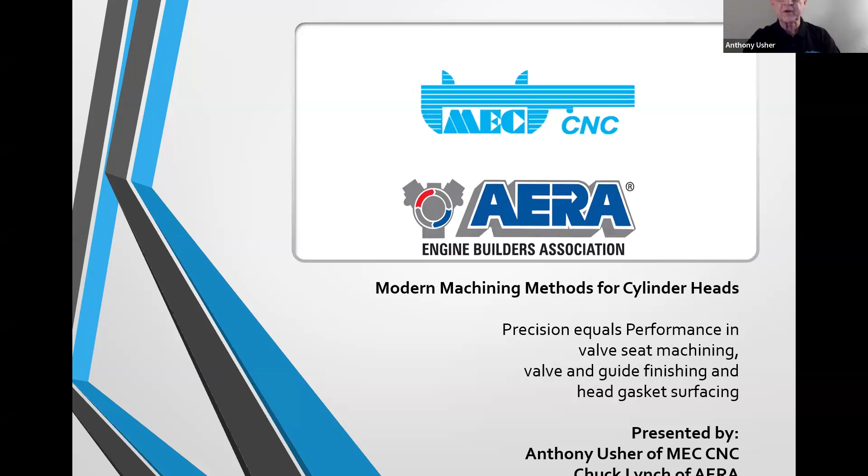I'm going to lead on the first part of this session, where it all begins: the valve guide. It's the heart of any valve train situation in a cylinder head. I'm going to let Chuck say a few things about the valve guide and take it from there.

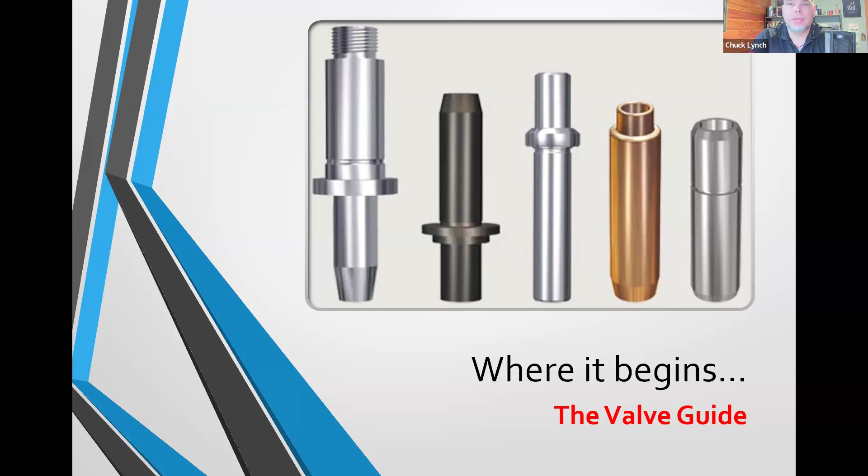As Anthony just mentioned, the valve guide is of utmost importance. When we get into the cylinder heads, I think it's one of the things we just don't give enough credit to. There has to be a point of origin, right? Everything has a datum. So you can't produce accurate valve seats if you don't first have good guide bores. If the reference point for the seat is subpar, the seat quality will suffer.

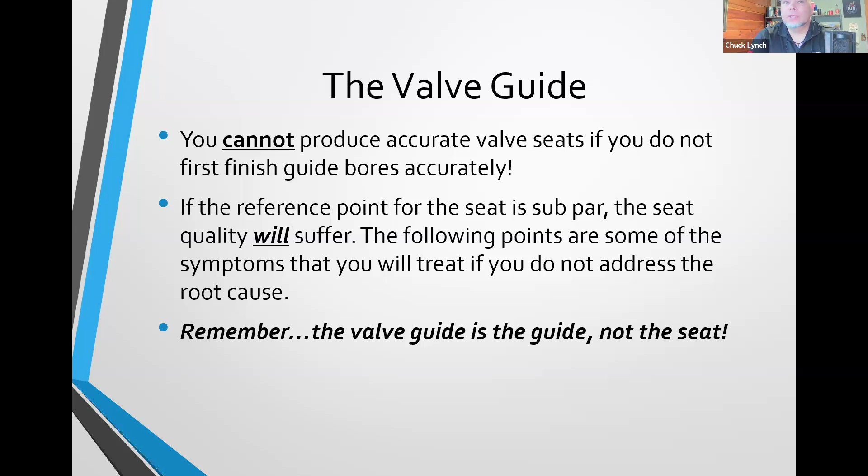So I like to summarize that the valve guide is the guide, not the seat. Now, one of the things we often see is people will vacuum test, and they vacuum test well. You're in essence putting two funnels together, and they will vacuum test pretty well because you can flex parts. So you really have to pay very close attention to the valve guide.

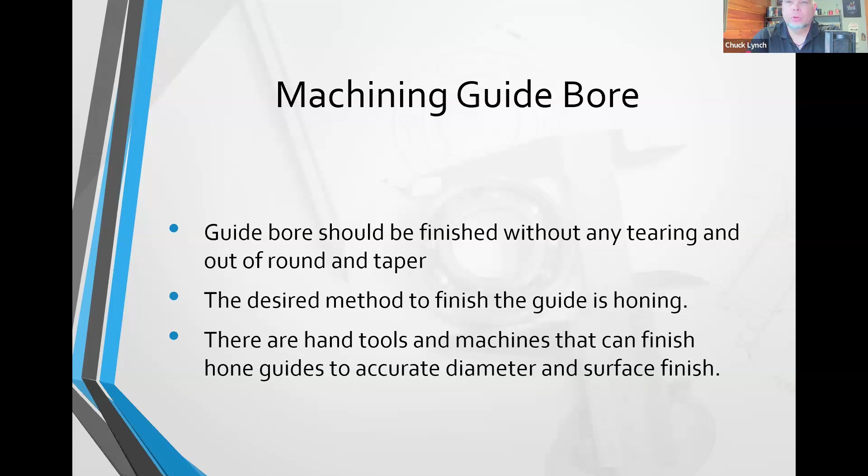Machining the guide bore should be finished without any tearing, out of round, or taper. The desired method to finish the guide is honing, to make sure you're straight, true, and round. A lot of people ream to get close, but ideally you want to finish the bore so you can really control surface finishes. There are hand tools and machines out there that can finish hones to accurate diameter and surface finish. Anthony, you want to jump in on that? That's your world.

Thanks, Chuck. Yeah, we focused on guide bore finishing, and we know the guide is the most important thing before we even start on the valve seat. So at Robins, we've been developing machines to do all the guide work with heads of integral guides. We've got a core drill system where we can core drill out the heads so you can install loose valve guides. We then have reamers that can bring the guides close to size, and then diamond hones to finish them. We've got a machine that does all these processes, and we're able to finish guides to very accurate tolerances, straight, round, and on size as well. That's the most important part of starting the whole process, before we get onto the valve seat.

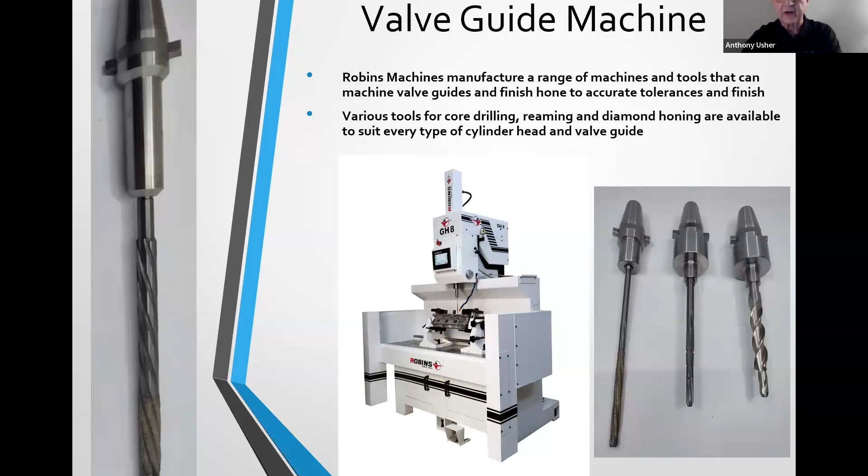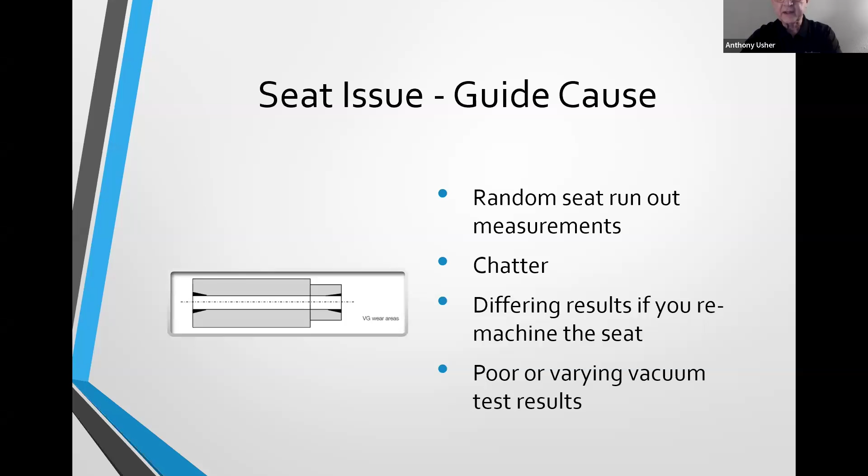So we'll move on to the valve seat, and a few other things about the guide that can create problems with the seat. Of course, random seat run out often comes from guide problems, chatter when cutting the seat, and problems like that. Of course, vacuum issues can come through the valve guide as well. So let's go on to a little bit about the valve seat.

Now we've got a perfect guide. Let's talk about the valve seat and what we need to get there. Chuck, would you like to come in a bit on the valve seat? Sure. So the primary function of the valve seat is to provide a combustion seal. We all know that — it's one of the reasons we vacuum test.

So concentricity, or seat run out, should be less than the stem to guide clearance. We get this question often on the tech line. People look for this — in my past, in the shop, everybody's looking for some kind of rule of thumb number: hey, what can my valve seat run out be? And you really need to think about where you're trying to put your stem to guide clearance. You cannot have more run out than you have stem to guide clearance.

I'm going to go back to my little analogy of the funnels. I have two tapered angles that are going to wedge together. Anybody familiar with machines knows the terms Morse taper, R8 taper — you have taper forces that are exceptionally high. So I can get those two wedges to come together, but what's going to happen to the valve stem? It's either going to flex the stem, but that stem's going to try to move proportionally. So in seat and guide machines, we often have an issue with perpendicularity, more so than off center line.

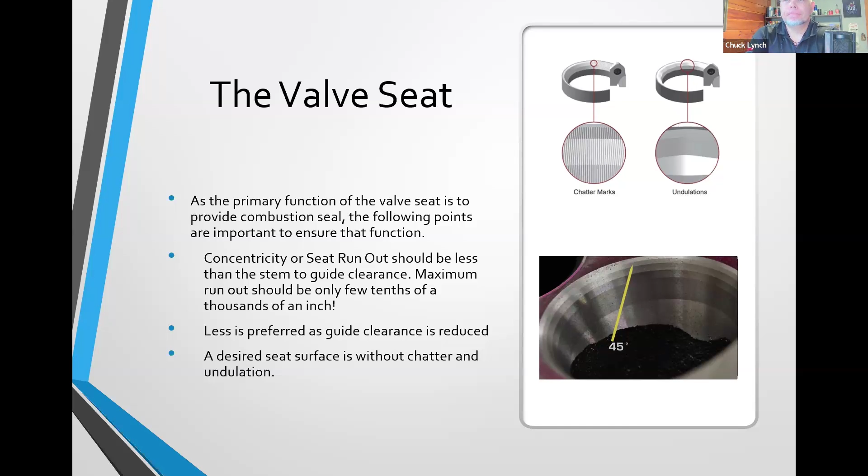Robins valve seat guide machines are well developed, a few thousand machines in service worldwide, up to nearly 30 years, and some doing 30, 40 cylinder heads a day. And these machines can get these finishes on the guides that Chuck's talking about, without chatter, without undulations, and with very little run out.

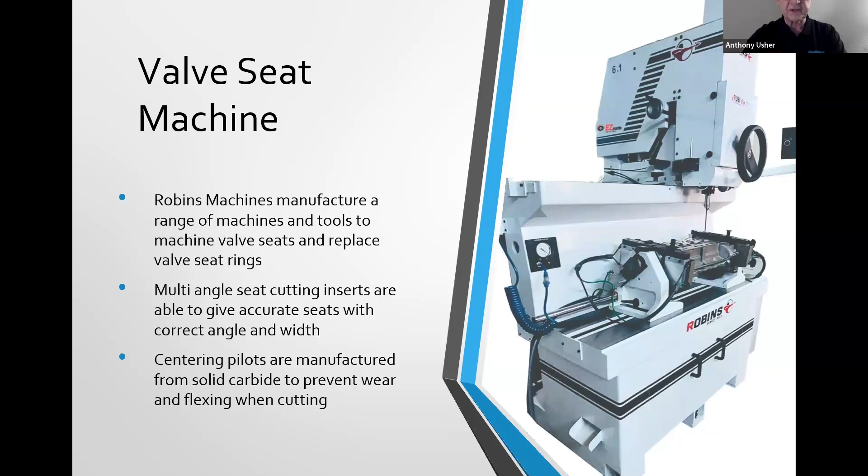The better the valve guides are finished, the less run out we get. These machines have multi-angle seat cutting inserts, which can have different profiles, different angles, different widths, so all that process is done in one cut. The centralizing pilots used for seat cutting are manufactured from solid carbide, ground to very high precision. Being carbide, they don't flex, and they have very little wear on them.

Robins have been developing some new technology valve seat cutting systems. We found cutting with a single insert creates some side thrust, and we've now developed tools that have dual inserts, 180 degrees opposed. We're finding that this cutting system is reducing side loading on the cutting system, giving better finish, much finer finish, and reducing run out once again.

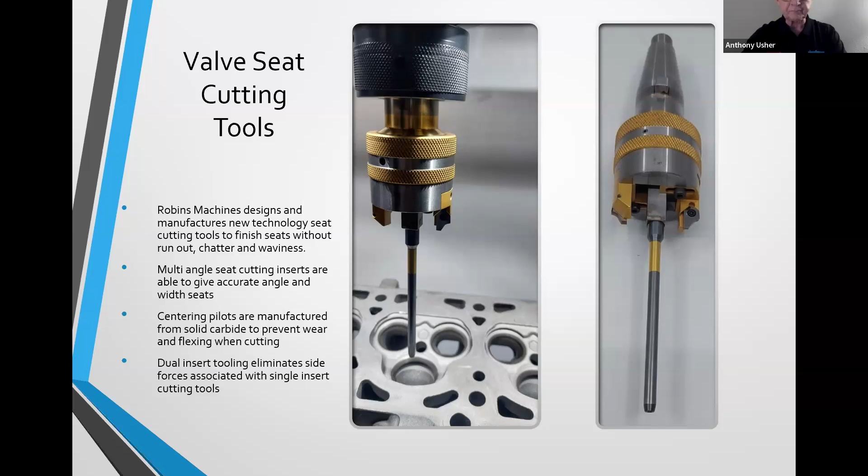So we don't have to have pointers on a valve. We can dial in exactly the diameter we want. Both insert holders are on adjustable slides, and the dial indicator will tell us that we have that exact diameter.

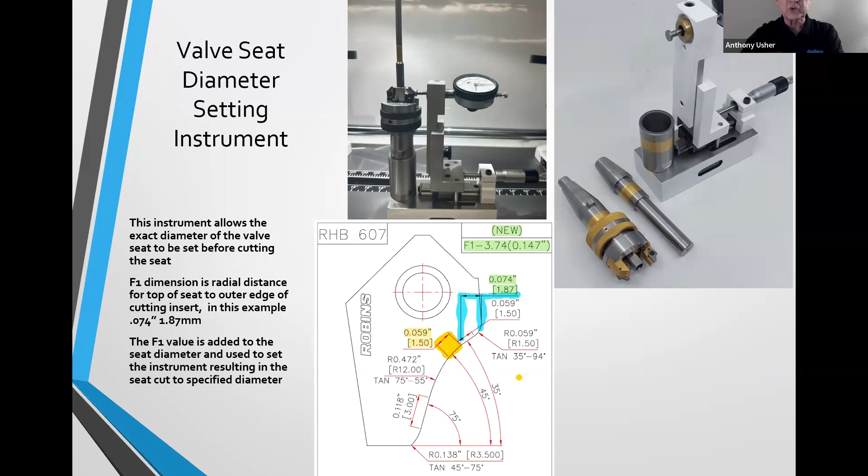We also provide this tooling system for counterboring housings for new insert rings, sometimes used for boring out old insert rings. Some insert rings are very hard to get out mechanically, and you've literally got to cut them out. So having dual insert tooling speeds up the process, and again we get very accurate boring sizes for these inserts.

And Chuck, I remember the other day we were chatting and you had something to say, the valve seat is not the guide. Maybe you want to say a few things about that? Right, yeah, I said that earlier in the presentation, and you just really need to drive that point home, that as that taper has that high wedge pressure, some of the racing heads have a 55-degree seating angle, so with that high wedge pressure you can create a lot of flexing.

And moving on, as you mentioned about transferring the heat from the valve into the casting, the importance is not only run out, but contact, that you are making good full contact.

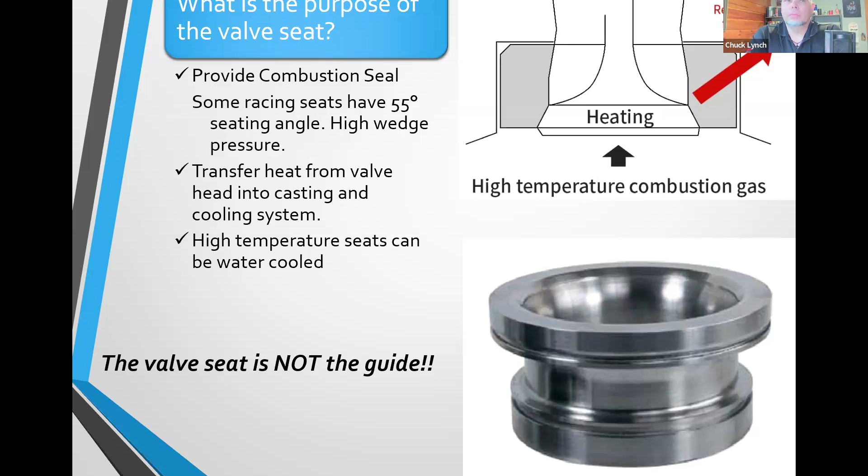In the racing world, this is not even the RPMs that we see high, but just for simple numbers, say 6,000 RPMs, the valve's opening and closing 50 times a second, and your exhaust valve may go from 500 degrees F to 1300 degrees to 500 degrees F, and we're doing that 50 times a second. So sometimes it's just hard to fathom what the valve seat has to stand up to.

So continuing on the valve to seat contact, in the past I worked on this a lot, trying to get to the point of having full face contact and non-interference angles. And quite honestly, even in shops where you can spend a tremendous amount of time on the valve seat job, it's just impractical because the seat insert manufacturer has a tolerance, right?

So Anthony, I would think that's usually plus or minus 15 minutes. Yep, on the insert. Well, the valve supplier also has that same tolerance, so the probability that you're going to be able to have full face contact is quite unreasonable. And then you also have cylinder pressure that is pressing against the valve head and is going to force that to the seat too. How much really depends on how the valve is designed, how heavy the head is, margin area, the materials that are used, and so forth.

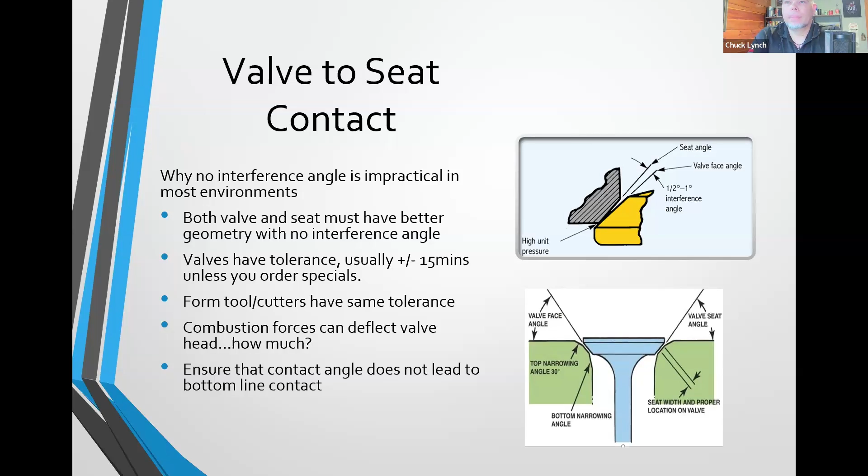That's really interesting, Anthony. Yeah.

I'm just curious, and we do have a question from the chat I want to throw out there now. It might apply a bit later on, and if anyone wants to ask one, feel free to type it into the chat, we'd love to answer anything we can. I'm curious, when we start talking about breaking parts, and the precision involved, not only in the surfaces themselves but where the seat is, where do the biggest problems come from when we're talking about breaking parts and having some inaccuracies in this?

Well, nice question, Brad. The screen I just put up is all about focusing on breaking valves. We've all heard about a dropped valve, where the head comes off and flies around the chamber and destroys everything. We look at it and say we had a bad valve, the valve broke, and we get a hold of the valve manufacturer and say your valve destroyed my engine.

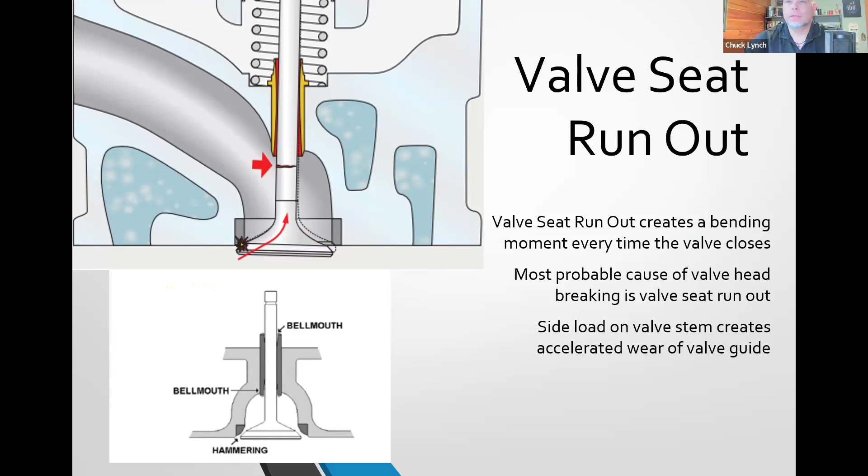Right, so yeah, vacuum decay, there are some standards around that. And I would just like to add, both of these tools individually are good tools. So a lot of folks vacuum test, but they don't have concentricity gauges. It's something that needs to change in the industry, because it helps you tell the condition of your equipment.

If I have consistent run out, say at 2 o'clock on every valve seat that I measure, I have something set up with my machine I can adjust. If it's random, it's guide sizing, pilot selection, something of that nature. If it's a machine with a steering wheel, I call it torque elbow, it's the operator. So if you have random seat run out, that's a tougher thing to address, but it can very much tell you what's going on with your machine.

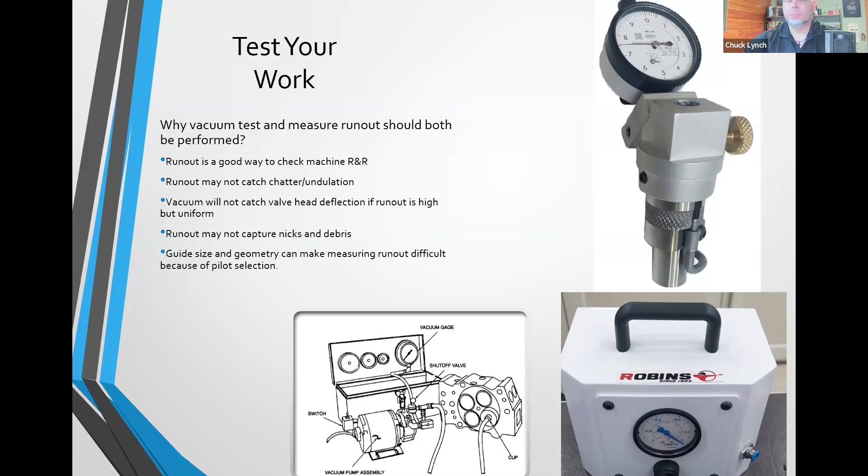Some little things on valve seat machining challenges that can create problems when cutting the valve seat. One of the points that I often find is people extending tool holders out to their max or even past their max radius dimension, which creates flexing and can create vibration. So most rigid tool holding is the most desirable process to cut the valve seats.

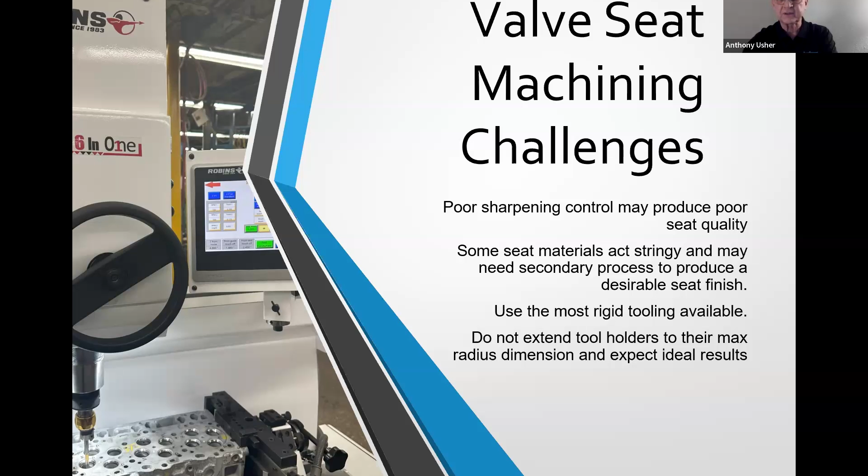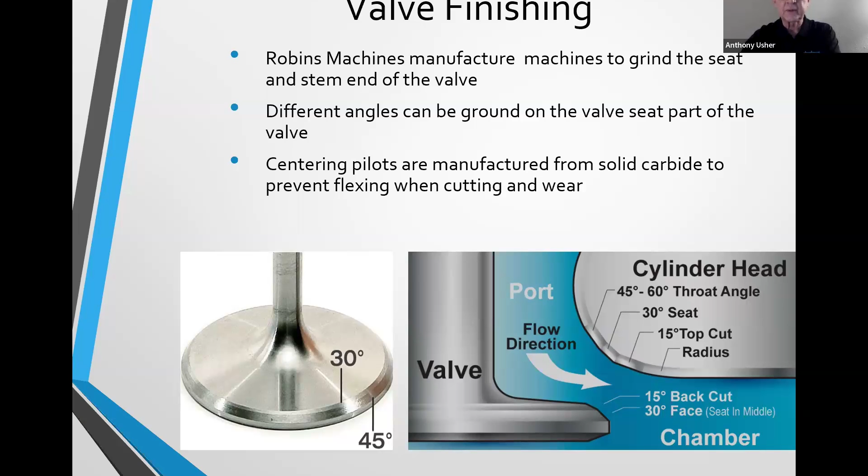I think we should also talk a little bit about the valve itself. When we talk about runout, we often talk about seat runout, and sometimes the valves themselves have runout. New valves, reground valves often have runout, and they create similar problems to what we mentioned before with seat runout. So this is an instrument that can be used to measure valve runout.

And in some cases, we actually have stem runout. So this instrument here is quite a sophisticated instrument. It can quickly be moved with the indicator on the valve stem to see any stem runout. And there's other devices available in the market just for measuring valve seat runout, or the seat part of the valve runout. And I always recommend checking even new valves. We find new valves can have up to 1 thou runout, and that can create vacuum problems. You can find them with vacuum, and sometimes you think it's the valve seat, meantime it's the valve that's actually got runout.

And actually an interesting thing that you can also do, you mentioned the stem runout, but you can also pick up on the shape of the stem. So say when the manufacturer is making the valve, it's just like cylinder honing, the different orders of geometry. So if I have slippage in the centerless grinder, I can have lobing on the stem, and sometimes it shows up after the engine's run in the guide for a while, and you'll see it looks like it's got tiger stripes or something, and that's a condition that makes it difficult to grind the valve face, because it's not going to repeat, especially if I'm running a centerless valve face grinder.

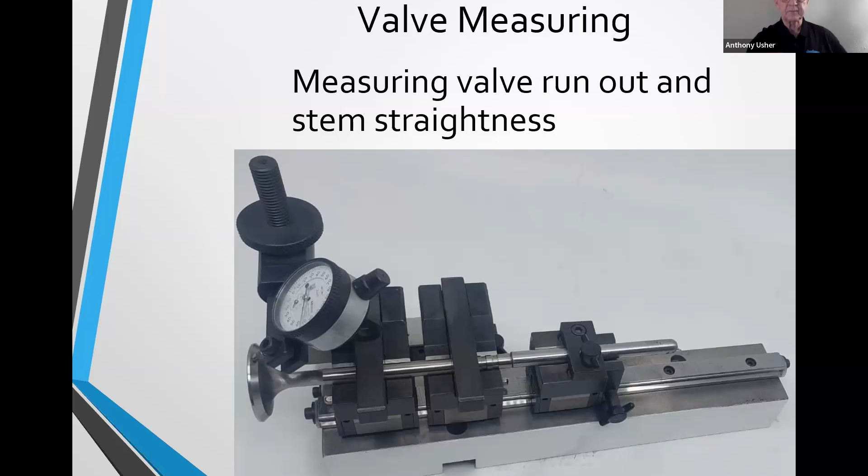Thank you, well said. And I know we sort of just talked about this breakage a moment ago, and I think this is a great illustration of it, Anthony. Yeah, I think so. It really shows if it's valve runout or seat runout, that's flexing on the head and wear on the guide.

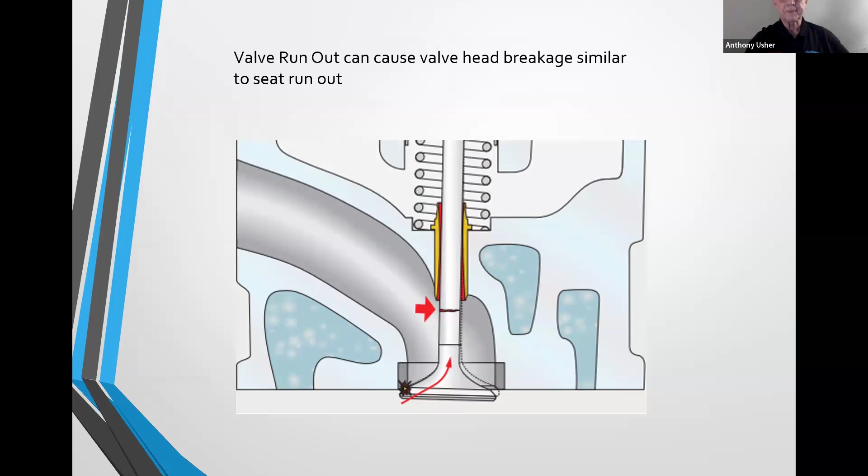Okay, that's a typical machine, a Robins valve grinding machine. This machine will grind a valve within 1 to 2 tenths runout, and can also accurately dress the butt end of the valve and chamfer the butt end of the valve.

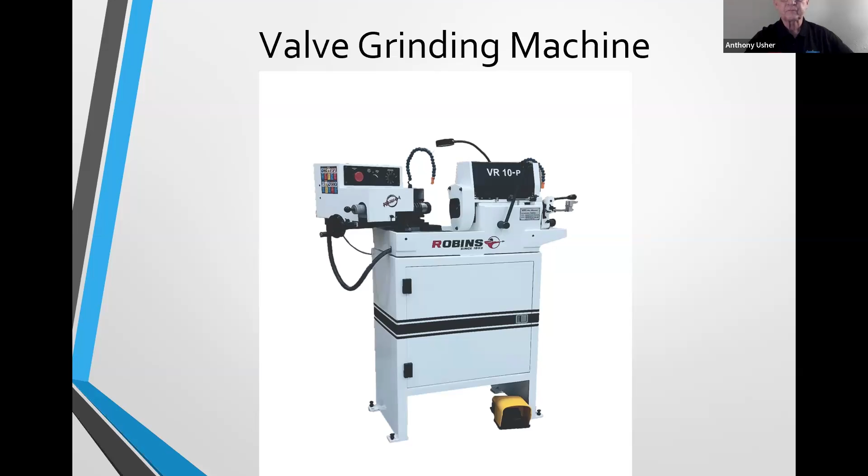Well, let's go on to talking about cylinder head gasket surfaces, and three important things. And I'm going to hand this back to Chuck. He's an expert on this head gasket surface.

So, surface roughness, flatness, waviness has always been important. But if you look at the modern engines, what percentage of them are using MLS gaskets? MLS is the acronym for multi-layer steel gasket. And they have taken that to definitely the next level.

This stuff has to be flat. It has to be smooth enough. And when we talk about flat, you have overall flatness, but you also have the waviness that's created, typically not by your insert or something of that nature. It's going to be induced by how rigid your setup is, or machine features. There are a lot of old gear drive machines that maybe induce waviness. So those are things that we have to look at today that we didn't once give a whole lot of consideration to.

So this illustration here is a good example of lay or direction. If we have a milling insert that's traveling in a particular path, and you get that semicircular pattern that's left on a gasket surface, that's your lay. The waviness spacing, again, that's what's induced by your frequencies within the machine. The waviness height, and then the roughness height.

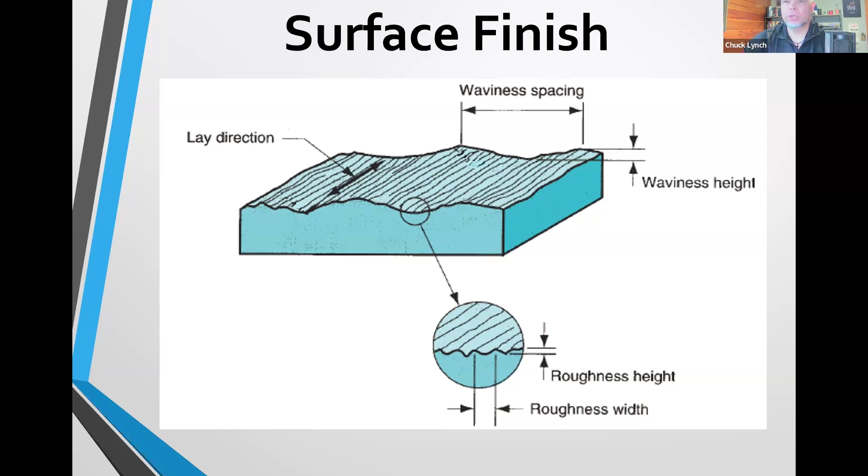So roughness height and waviness height are totally different. You can have a roughness that's ideal, but have excessive waviness and still have similar type failures. So there's a lot going on with surface finish.

But that's what the MLS gasket people are talking about today: waviness. What does it look like over a long distance, not just a short distance? As Chuck said, roughness can be good, but waviness could be poor.

Right, right. Something simple for the folks that maybe aren't into the engine machining part of it on a day-to-day basis. People are always interested by measurement, and when we talk about measuring surface finish, it's the most accurate stuff that we're doing in engine building.

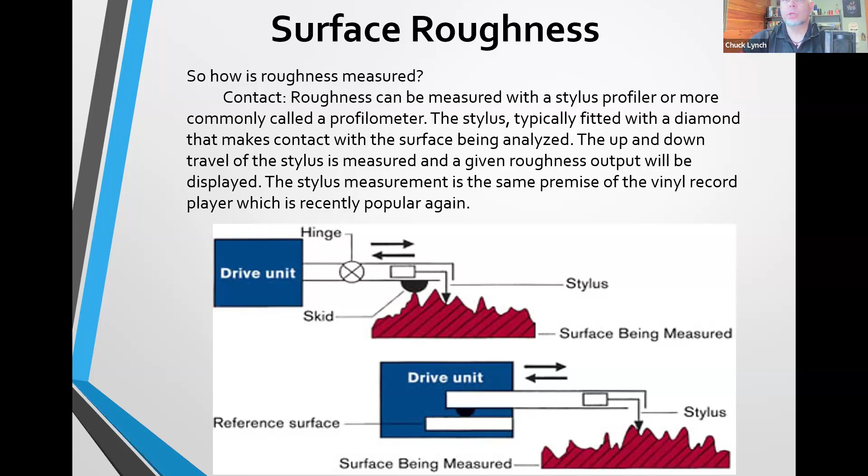And it's extremely important. We've done a lot of stuff on cylinder honing as of late, been a ton of good presentation on that. Mark Malberg's been helping out on a lot of these different areas of surface roughness, flatness, waviness, and so forth. But when we're talking the roughness for these gaskets and piston rings, if you were to take a hair follicle, which measures about 3 thousandths, and look at the column end of it, you're going to slice that 2,000 times. And that's the kind of stuff that we're measuring.

So just to put a real world kind of measure to that, that's how small of a scratch in the surface matters. So anyway, surface roughness can impact the gasket's ability to perform in the short term and the long haul. Aggressive surfaces can shear gasket materials. Back in the day, we used to say, oh, we need a gasket surface that can bite the gasket. Even with composite gaskets now, those days are kind of gone because we do heated pre-flattening and there's the coatings and so forth. We don't need that anymore.

So aggressive surfaces wear down quickly. They allow combustion armors to move and ultimately leak. This is all often observed as fretting or false Brinelling when evaluating head gasket failures.

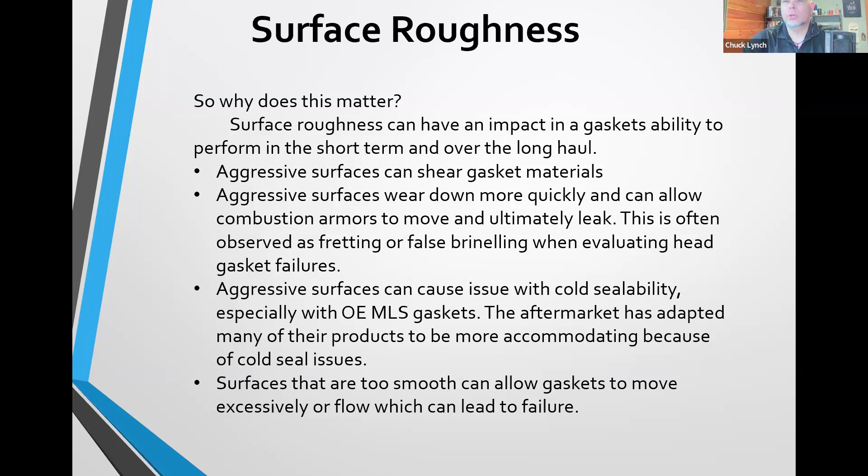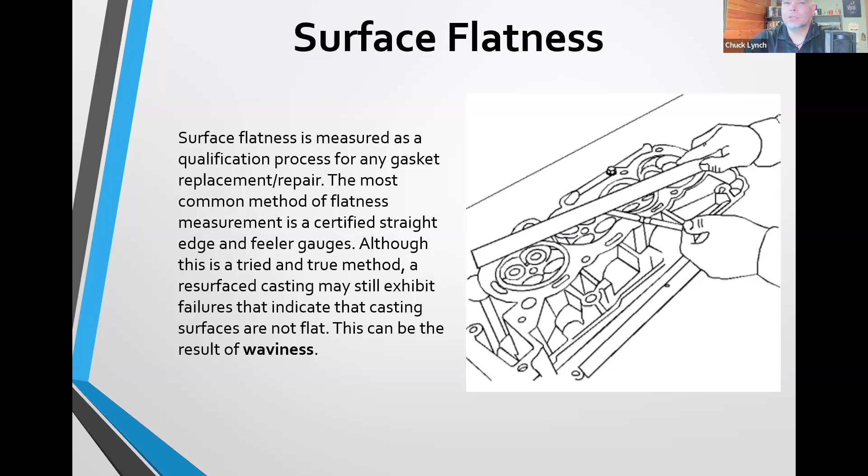If we're using milling or grinding, we're just not going to get there. You would have to lap the surfaces, so it's not so much of an issue anymore. Surface flatness is, this is in service manuals and so forth now, and people use a straight edge and a feeler gauge, and it's just about gotten to the point where it doesn't bring a whole lot of value. There's too many surfaces to check in small little areas. If I got a feeler gauge that's a half inch wide, and I'm measuring an area that's a thou out of flat, you have to measure so many areas to indicate that. So again, I don't think this is much value anymore. Most everything needs to be resurfaced. If it was taken off and went to a shop, you better resurface it. That's strictly an opinion, but that's kind of what the industry yields anymore.

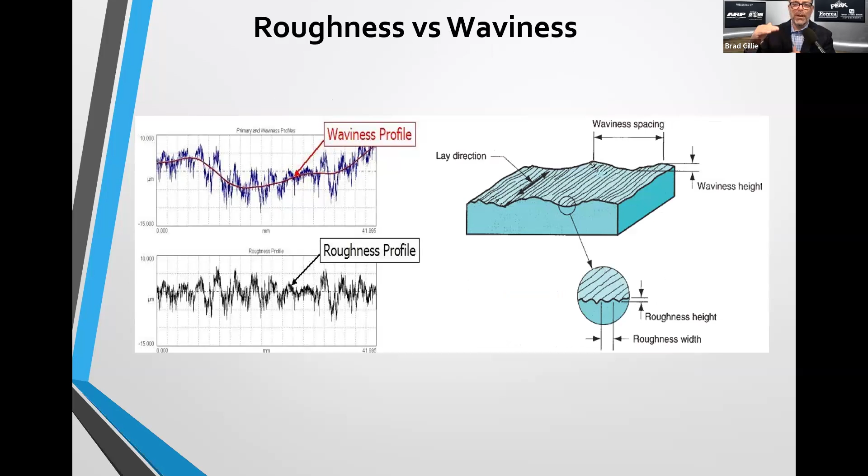That's a great illustration too of just what impact the waviness is going to have, with the higher points and the lower points versus just the same peaks on the roughness side, whereas the wavy side is definitely going up and down. I think that illustrates very well what you were talking about.

Right. An MLS gasket doesn't conform to those waves like a conventional gasket does. So it's kind of like a suspension bridge. It's under tension, so it's not sagging all the way to the very bottom of that valley. So it just doesn't conform. So I have a leak path under there and over a long distance.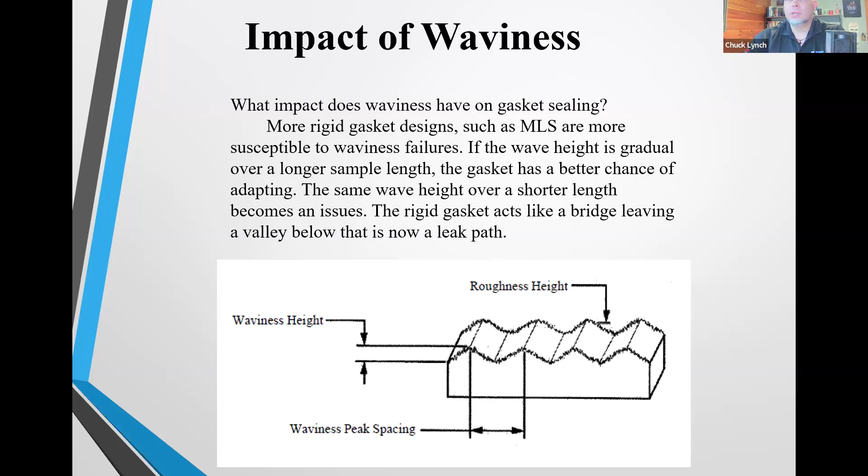Now I've dissected a lot of MLS gaskets over the years, and they hide things because of the coatings and the type of material it is. You don't see some of the indications that you would see in a conventional gasket. But one of the things you can do is drill out the rivets and lay out the layers, and sometimes you see where combustion went between the layers of the gasket. It looks like tiger stripes or zebra stripes or something, and that's an indication of waviness. So stuff was moving between the layers of the gasket that didn't really show up on the face so much.

So that's kind of a good thing. You say, hey, if I've got combustion in the cooling system, hydrocarbons, or whatever, then maybe I take that gasket apart.

All right, some factors that influence roughness and waviness. The cutting tool insert, PCD works terrific for aluminum, but will fail quickly on cast iron. CBN works for both, but usually you tend to see some smearing on the aluminum. The aluminum galls to the insert a little bit, and it may not even take it out of the roughness and waviness parameters, but visually, which, we do a lot of visual identification of what we feel is good or whatnot. So sometimes we use the PCD, the polycrystalline diamond, and we just really like the look of that.

The insert edge prep and condition, tooling suited for iron but not aluminum. You could have a situation where the edge prep of the insert would be honed or have a taper they call a land. And if you take away that sharp edge, it's less likely to chip. So it gives you more durability over a longer period of time, but you also tend to have more tool lift. So you may not get as truly flat of a surface as you would with a very sharp insert. So again, you got what does the tool yield, what can I tolerate?

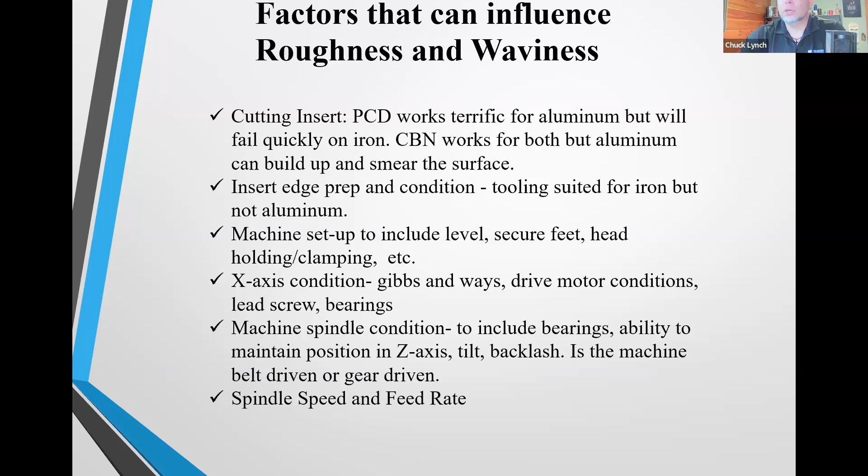Spindle condition, bearings - again, it goes back to preventative maintenance. Speed and feed is the one that people typically think of the most that impacts roughness. Where waviness could come in is, do you run your machine faster than the capability of the machine? Then you could induce some waviness and so forth, because you start to get out of balance or something.

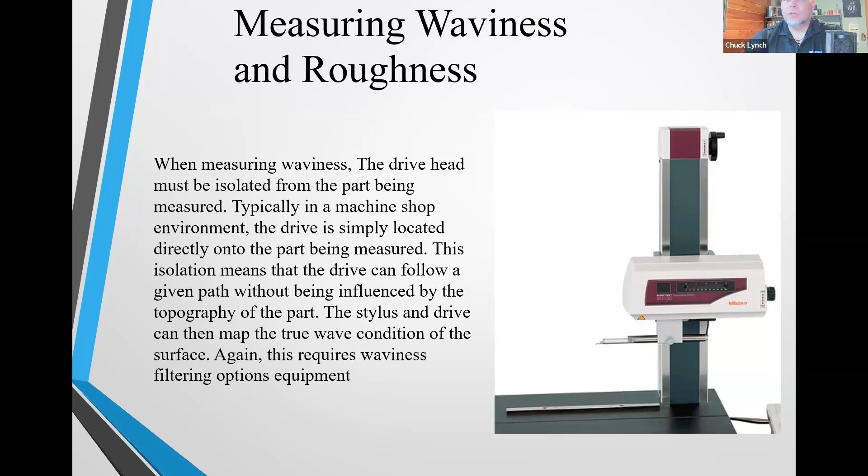Again, I think we kind of covered this pretty good - measuring roughness versus waviness. The device to measure waviness is a skidless instrument. Skidded instruments are used to measure roughness. So the skidded instrument will set right on the part, and the skidless instrument, which is shown there, you isolate it from the part that you're actually measuring. That goes into more detail about the device being used. But if you're going to measure waviness, you have to step up to the next level of equipment, which is a skidless profilometer.

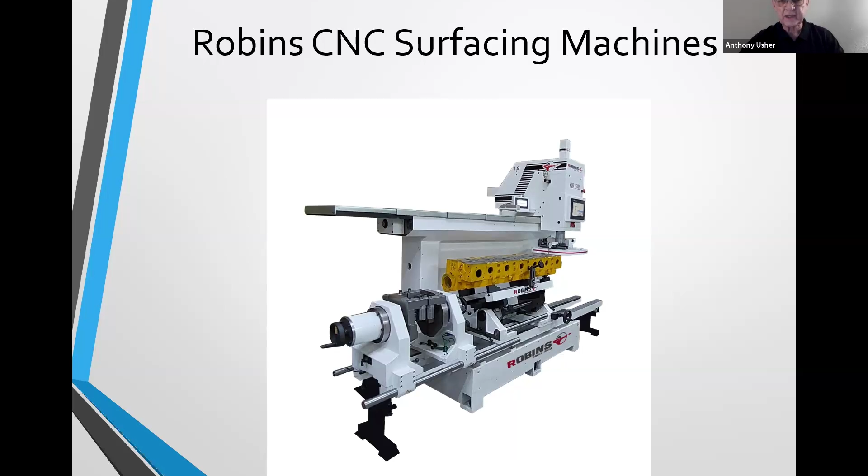I'll go on to this solution and the Robins machines. We at Robins have done a tremendous amount of development on surfacing with these three factors: roughness, waviness, and flatness. The whole design of the machine - the precision ball screws, the servo motors, belt-driven servo motors driving the ball screw - all these factors come together to produce extremely accurate roughness and waviness. And of course, the whole accuracy of the machine will also induce very accurate flatness. So these three factors are what we have taken into account with Robins surfacing machines. We can handle from very big heads - this head is nearly 44 inches long - down to very small heads, single cylinder heads, and produce those three factors to very accurate tolerances.

Well, that's about all I have from my side for now. So I'll say it's time for some questions there, Brad.

Yeah, for sure. And by the way, for both of you, that was quite an education - from both you and Chuck, and Anthony, and obviously what a great solution as well, Anthony, with Robins. We do have a couple of questions. This one says: what sources are there for cylinder head/block dimensions, architecture, datums, locations, angles, etc.? So I guess this is, what sources are there to make sure that we're having the right accurate measurements, angles, and all of that?

Land speed record holder George Poteet's Speed Demon rocketed 481 miles per hour at the Bonneville Salt Flats. You don't go that fast without ARP fasteners. There's no way we could go the speed we've gone, the number of times we've gone, with a lesser quality bolt than ARP supplies to us. We absolutely wouldn't be where we are today if it weren't for ARP. When failure is not an option, it's ARP-bolts.com.

We're Performance Plus Global Logistics. Our team of dedicated performance industry and logistics experts get valuable cars and components to the track on time and in top condition. We provide expedited logistics solutions for the performance industry using direct routes instead of deferred options, and communicate all necessary information to the appropriate resources to meet regulations and ensure smooth transit and secure delivery, both domestically and internationally. We exceed customer expectations by providing best-in-class service with an efficient, cost-effective system in place. Contact us today to book your next shipment.

You work as hard as your truck, and you have no time for downtime. That's why more truck owners trust BlueDEF, America's number one diesel exhaust fluid brand. Each batch is guaranteed pure, so you can avoid costly repairs caused by inferior DEF. Demand America's best for your truck. BlueDEF and BlueDEF Platinum, put trust in your truck.

With roots in the Midwest that date back well before the Model T, Fifth Third Bank has a long history of serving the needs of automotive companies. While much has changed over the years, our passion for helping businesses put cars on the road and on the track has not. Today we are more committed than ever, as a member of SEMA, a founding member of PRI, and a sponsor of multiple race teams across several racing series. For over a decade, Fifth Third Bank has been a staunch supporter of our industry and a great partner for many companies in motorsports. Our business has been growing extremely fast, and we could not be where we are today without Fifth Third. They provided amazing strategic advice and the capital we needed to support our phases of growth. They are true partners for me now, and what they do with their involvement in motorsports is untouched in this community.

Where can we take your business? Fifth Third Bank.

Where will you find Ferrea racing components? Circle track, drag racing, and any top race shop. In every form of motorsports competition, our valves and valve train components deliver race-proven design and technology, and we've brought that same performance to our street applications as well. We're backed by five decades of experience, an extensive range of off-the-shelf components, and our custom valve department has the fastest turnaround times in the industry. Ferrea Racing Components: stand with us, or race against us.

Scribner Plastics has provided professional strength shipping containers to the automotive and performance industry for over 40 years. We have containers that fit most unique configurations of complete or partial engines and transmissions. Today we highlight part number 5148, the cylinder head shipping and storage container. The base has double-walled durable construction featuring a cinch strap with an abrasion sleeve that securely fits your small block, big block, and pro stock heads to the base at all times. Talk to your dealers and distributors about the shipping and storage container for cylinder heads from Scribner Plastics, part number 5148.